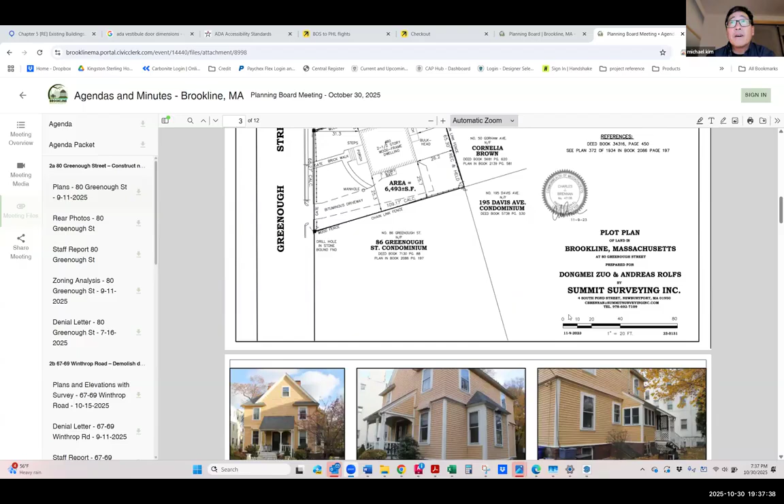The rear yard has a 30-foot setback. The house is slightly existing non-conforming. And I think it's important to note that in the rear of the house—I don't have the picture, oh yeah, sorry—there is the side of a garage and pretty much nothing else.

So going into this backyard affects pretty much nobody, and we're able to preserve the front of the house in its entirety. So we are applying without a compensating amenity, though I think it's a strong reality that keeping the existing house with all its nice detail facing the street is a nice amenity for the neighborhood and for the community.

As the owner, Mr. Rolfs explained that they are doing this for their now adolescent disabled son. To this date, the father has been carrying the son into the building, which was fine when he was a small child. He's now an adolescent, and none of us are getting any younger. So it becomes increasingly difficult, and this project is designed to accommodate them.

I'd start on the second floor where there's a new master bedroom suite and their son's room will be adjacent. He needs assistance through the night, so the doors are combined. And then a large barrier-free bathroom forms the extent of the addition on the second floor.

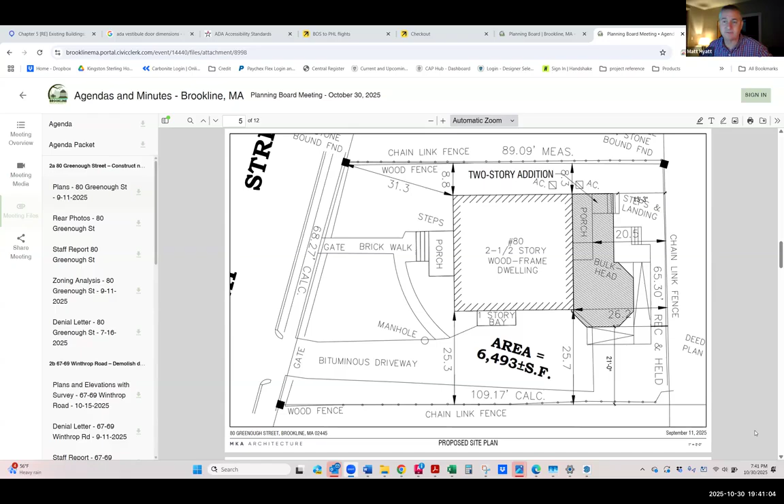So I guess I will turn it to members of the board. Also, if you have thoughts on whether or not we should be looking for a counterbalancing amenity—I was looking online, the site's really well landscaped, I don't think it needs more of that. Nothing that Michael's proposed, I think, detracts from the appearance of the house. It's quite handsome, but I'm interested in your thoughts.

I have a question, Michael. It looks like the first section of the handicap ramp that comes off the driveway is a ramp on grade, is that correct? And then it becomes structural—correct. And the first section is a 1-to-20 slope, meaning it's not technically a ramp, just a footwalk with rails. And then the ramp is the second link.

Yes, I see. Your plan didn't show grading, but I'm sure there's nothing of concern—I think the only thing to be careful about would be where the water's going, making sure you haven't changed the direction of the natural gradient of drainage. That would be my only comment.

Fair point. And the lot is so flat that getting a contour survey didn't show anything. Right, so I'm thinking that you're pitching the water to the side as well as a little bit to the other side, and you should maybe have a little curb-like barrier so you can maintain the water on your site and not create any issue for your abutters. That's the only question I have, but other than that, point taken.

I'm good to go. I think it looks like a needed and modest sized addition to meet those needs.

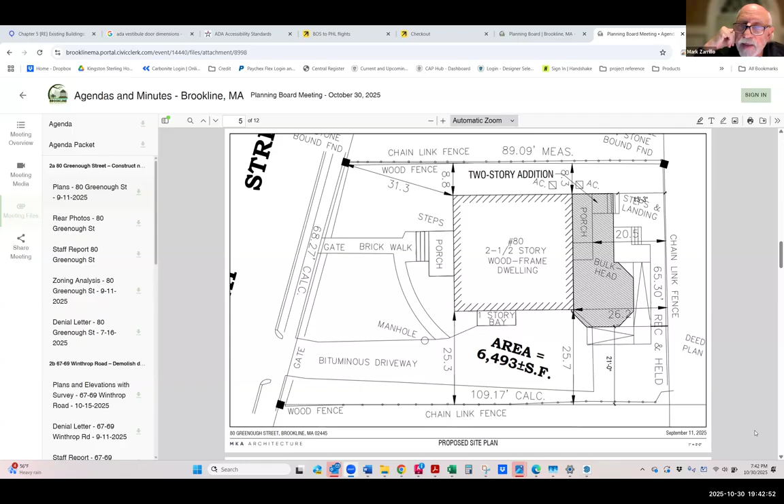Is the ramp a structure, or is it made out of paving on grade? Both. This portion will be made on grade, the 1 to 20 portion. The 1 to 12 will be wood with composite decking.

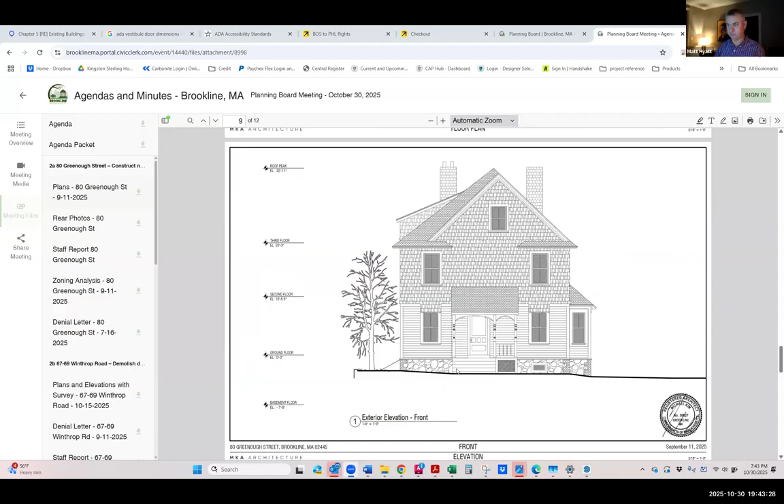Do you need a railing on the 1 to 12 section? Yes, you do. It does look like that is steeper or higher than a 30-inch drop off. Yes, and here it is.

Sorry, the other thing - we would obviously be landscaping and properly draining, and probably making sure the ground is adequately porous, or making it so.

You also should have a slight edge to the sloped walk. That's usually required if you don't have an even grade, just so the wheel doesn't roll off - it's contained. I think it has to be 2 inches high, just a little edge condition so you don't end up slipping off to the side. Another good point. Thank you, Mark.

Thank you again, Blair. Andrea, and then Steve. So I think I understand it now. If you go to the plan - this is more an architectural question - the triangles created by the ramp and the octagon, that's all open. So if water were to get in there, would it drain through the ramp, which is open underneath, or does the ramp have closed walls underneath it?

First of all, these are planters, so they'll end up being planted. There'd be some drainage through the structured portion of the ramp and small deck. And this being on grade, we'd have to manage the drainage.

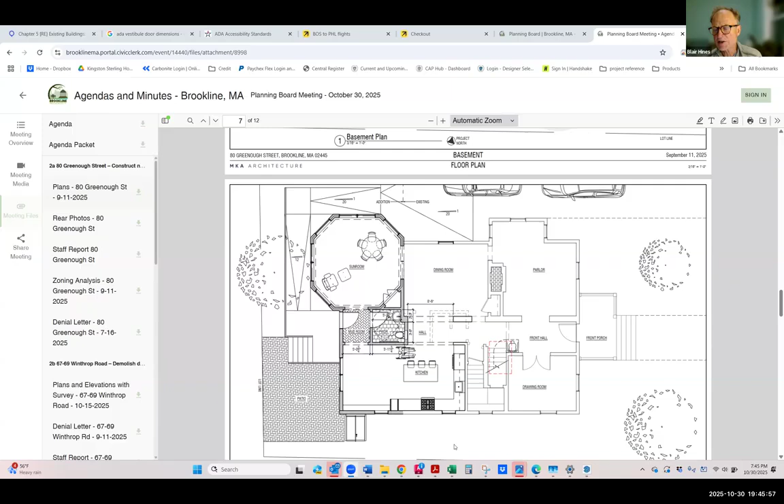I'm just thinking of the abutters - I think part of this would depend on how the existing roof downspouts are. Are they grandfathered into the sewage drainage system of the town, or are they flowing overland? They end up on the surface.

Okay, I'm trying to see if we're having one. Oh sorry, and interestingly, architecturally, there are no gutters in the house. So the roof runoff drips onto the land, directly onto the soil. And while we did not do any excavation, I would imagine it would be sandy loam or something with some porosity, unlike my house, which is less than half a mile away, which is all clay. So it surprisingly works quite well with a simple drip edge off the edges of all the roofs.

There's apparent evidence that the soil is reasonably porous, and there's no evidence of drainage going onto the abutters. Okay, thank you. Yeah, these are great points you're making about drainage, planning board members, but keep in mind that before they get a building permit, the DPW will review all of the drainage issues before they sign off on this plan. As you may or may not be aware, our neighbors to the west are very adamant on stormwater management to the point of overkill often, but I think our square footage is below their provisions, not that it applies here. Just an FYI. Thank you.

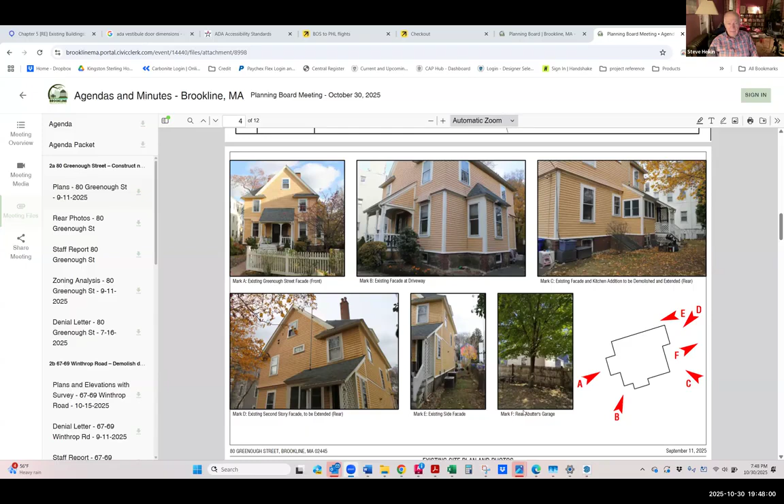We'll go to Steve next. Thanks. So I also had a question about those triangular spaces between the ramp and the sunroom, but that was addressed. But Michael, if you could go to the basement plan - I'm okay with this project, I just had a technical question. I see that within the new octagonal sunroom, you say it's a crawl space.

There's also a bulkhead door with what looks like a couple of steps down, and then there's another sort of half flight of stairs between this new space and the existing basement. So I'm just wondering what's going on there - is it a crawl space or is it a full height space? I'm just not clear on the relationship of this addition.

That's a good catch, actually. We've moved this bulkhead several times. There's no need - the owners have no need for additional storage in the basement. Therefore, to save costs, we're doing a continuous foundation, but we can keep it at 4 feet below grade.

Yeah, but that is true - to get into this portion of the basement, the dashed line is the existing bulkhead access to the basement. We'll probably extend it here to make this the same level. But that is not on the drawing. I didn't catch that with my draftsman, and you did.

So thank you, we will correct that. It doesn't affect the plans at all, but there was an unclear relationship between what's basement and what's crawl space. Good catch, fair enough.

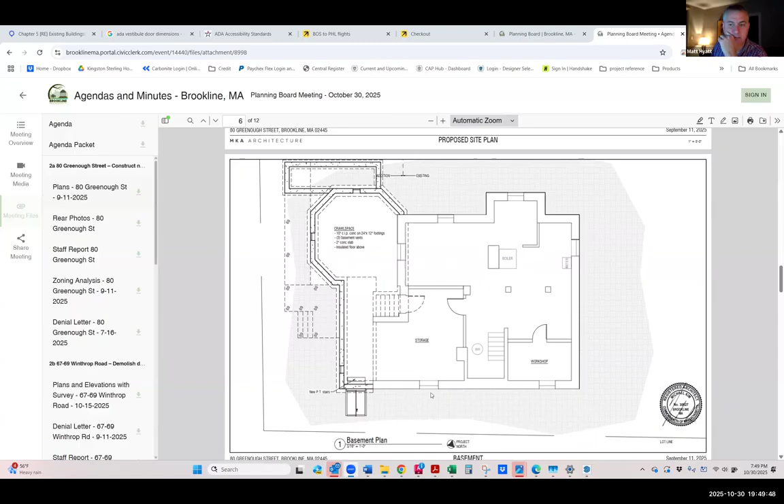It's only for the length of the ramp that condition exists at the edge of the driveway, but that could create some issues if you're not dealing with it up front.

Yeah, point taken. We did take, sighting off of a 4-foot level, the existing floor, the existing grade, trying to get this to 1 in 20 so we didn't have to do the full railings. So that part we're not 100% sure about, but yes, we will address it.

Did you have any drainage, spot any sort of grades you were working off of, Michael? Did you have any spot grades you're working off of, or no? No, because there's less than 1 foot of contour over the entire site, so we tried to put in a contour.

There's less than 1 foot of contour over the entire site. Right, no, I understand that.

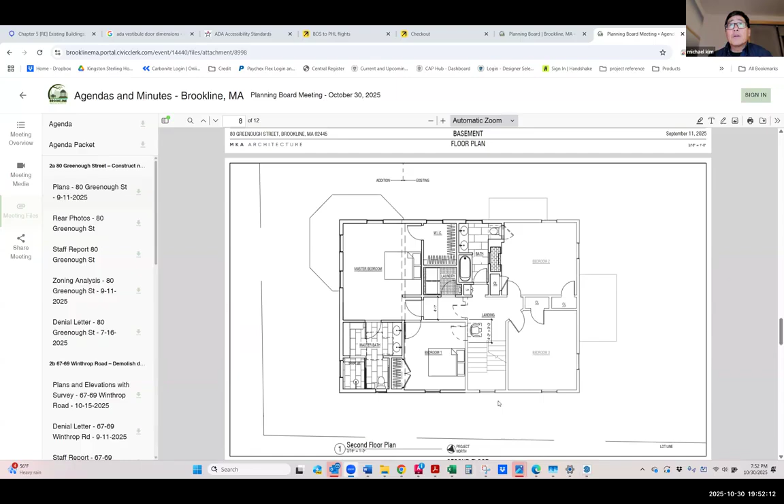Well, it seems like you're building up a ramp, actually starting a bit of the slope from here at the driveway. Yeah, mounding up.

I mean, as part of the building permit, wouldn't he need a site plan with the grades? Well, again, there wasn't enough grade to show.

Right, but you're creating a grade, and we'll put in spot elevations. We don't have a transit in the office, so we kind of did this with a homemade transit.

Well, it seems like at the end of your ramp on grade, before you go to a structure of decking on piers, you might just have a 1 or 2 foot retaining wall, with a fence, so you're not creating a slope down. And this is often done by the landscaper in situ.

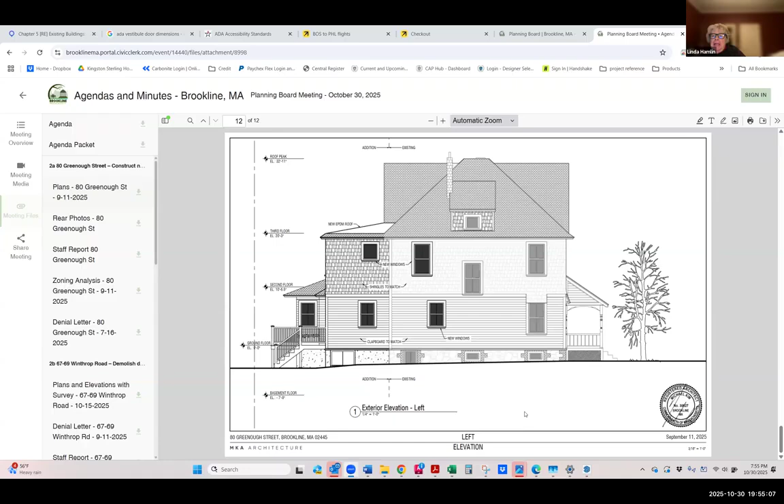Not sure what it does for you, but it keeps the rain off your head, or your nose. I think Linda's point is also that where it ends seems like a weird spot, doesn't it? Yeah, it goes beyond the deck. I'm not getting it.

I think it's just a drafting thing that needs to be cleaned up. Or if you really wanted to make it useful, maybe you'd extend the deck, or extend the octagonal roof straight over and end it there with a bracket. Otherwise, it's not really doing anything for you. Make the stair wider or move the deck over, and put a column.

You know, I remember the red line. I took that distance, projected it vertically, made it equivalent, and did that. That was my aesthetic judgment at the time, and I think I'll reconsider. Okay, right, we're just hot dogging here, we gotta earn our big salaries.

Yours is probably bigger than mine. No, ours is zero. When I serve on the board, mine is several multiples of that, in fact.

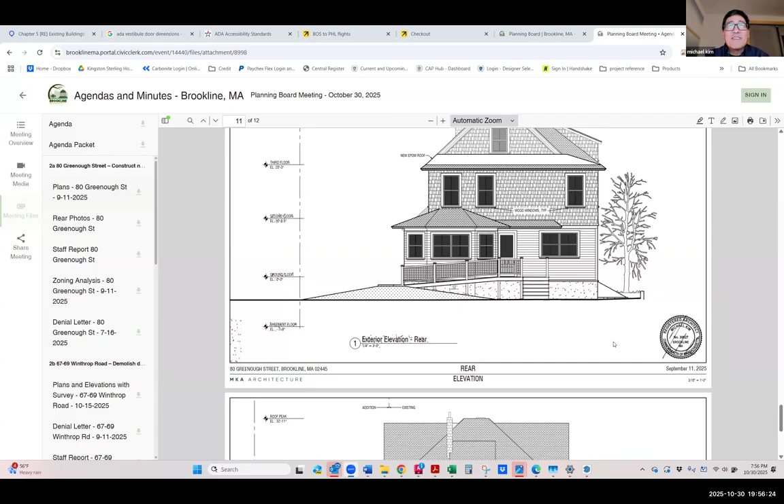Anyway, other than that, I think I'm glad that it's being done to this house, and I hope it satisfies the needs. I have one other question.

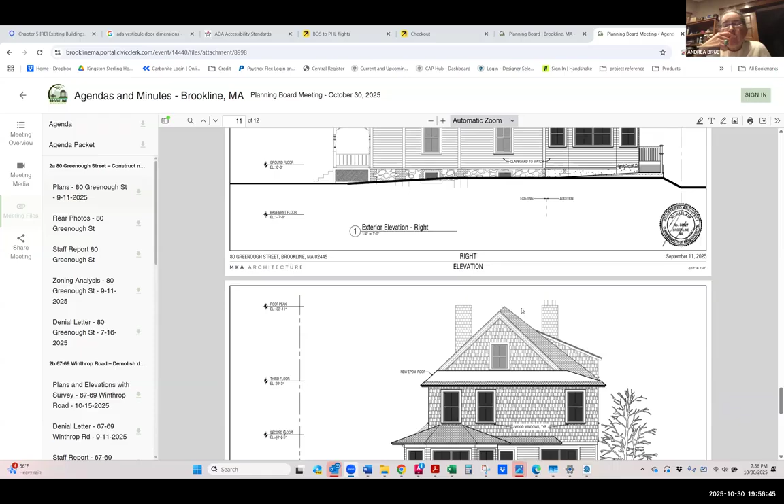On the second floor where you have the EPDM roof, then you have shingles at the eave. We're trying to recreate this detail so we don't just have an edge of rubber. It's a small decorative band to try to conceal the fact that most of it is rubber, since it's too shallow a slope for traditional shingles.

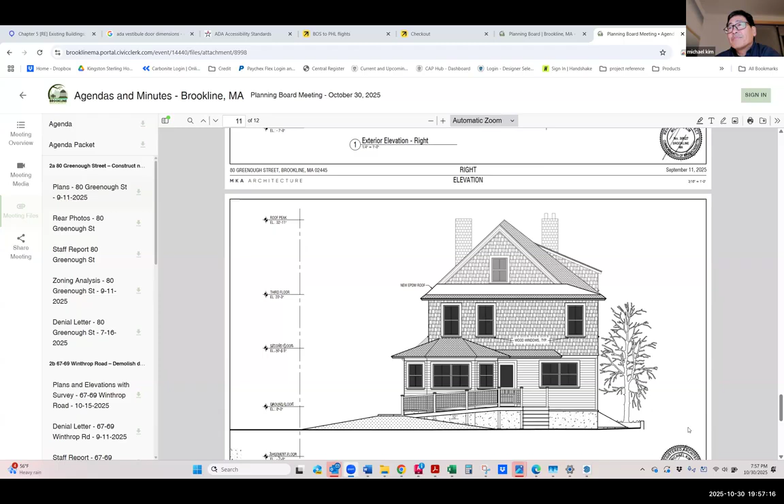Without blocking this window, I'm just trying to picture that outside corner, actually at the edge. The line weight is to try to make this darker, but here we would be extending this plane for that short period.

And yes, there will be several discussions with the framer and the roofer on site to work that out. That's a detail I don't think I've seen, how an EPDM roof transitions into shingles. Good luck with that. Maybe metal would be more appropriate, or something—it might be easier to build too.

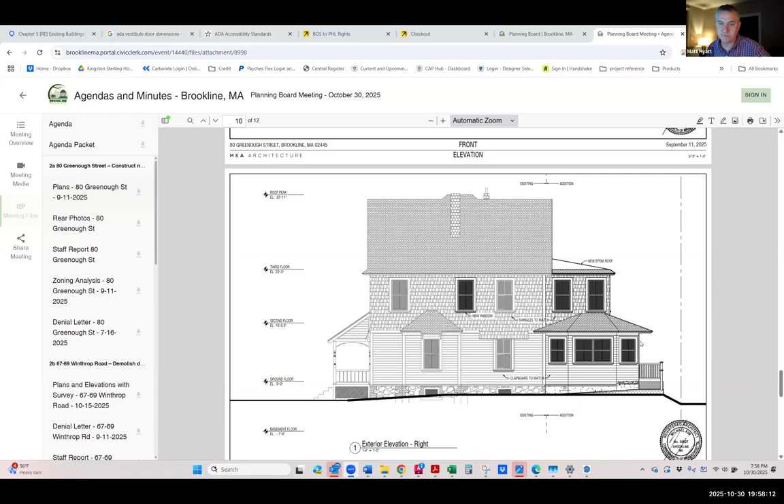All right, but conceptually, I think we're all aligned with this project. Let's see if there's any members of the public who'd like to say anything. If you would, please use the raise hand function in the reaction at the bottom of the screen.

I can do a stop. I'm not seeing any hands raised, so I think we can move to a vote.

I would agree with you, Matt, that we should strike number 2, which is the landscaping, because although occasionally the Board of Appeals has allowed an architectural feature to serve as a counterbalancing amenity, they don't really like to do that. I would agree that it's an amenity, but it may not serve for 5.43. So you may want to just give the special permit under MGL Chapter 40A, Section 6, without a counterbalancing amenity. That seems appropriate to me.

Anyone have challenges with that? I'm okay with that. Fine, all right.

So the planning board recommends approval of the site plan prepared by Charles J. Brennan, professional land surveyor, dated July 3rd, 2025, and architectural plans prepared by Michael Kim, registered architect, dated September 11th, 2025.

And the planning staff recommends the following conditions. Number 1, prior to the issuance of a building permit, the applicant shall electronically submit final floor plans and elevations stamped and signed by a registered architect, and a final site plan stamped and signed by a registered engineer or land surveyor to the director for regulatory planning or designee for review and approval.

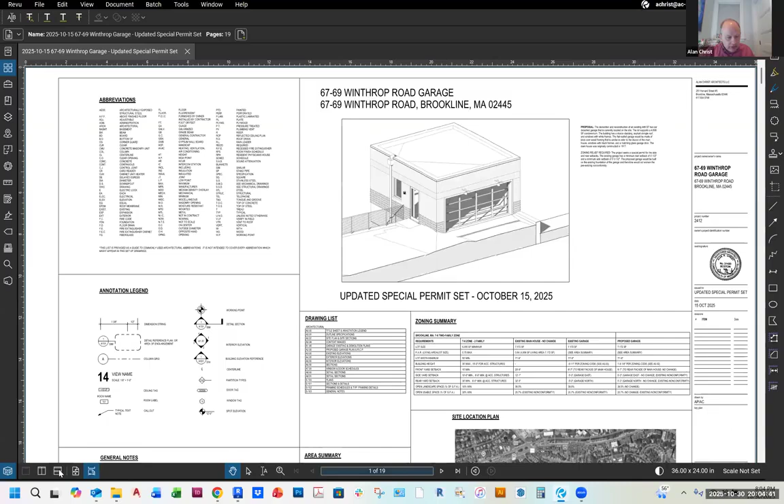I can go to some photos here. Okay, it's a concrete structure with block walls. It has a very low ceiling, it's structurally failing, and it has no parapet—it just drains onto the walls here. So the concrete and block structure is a heavier structure.

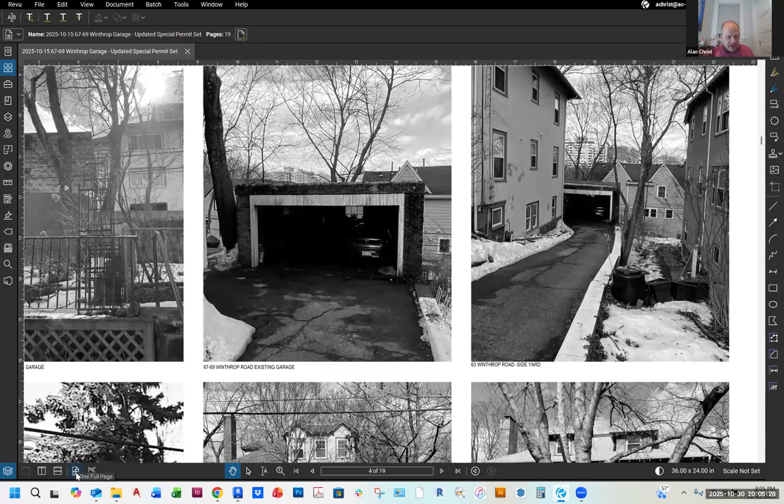So our intention was to reduce the loading on the foundation by changing to a wood frame structure, which has a clear span through the provision of TJIs for the roof framing, and then it has an 8-inch parapet with proper parapet drainage.

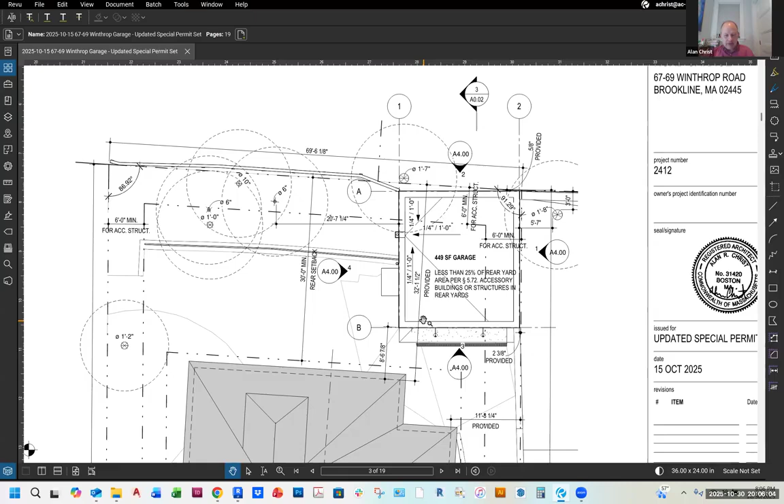So this is what brought about the special permit, just the fact that the TJIs and a proper parapet, and also a realistic amount of space for a garage door opener, increase the height of the structure. Those are the only things increasing the height—it's the provision for a lighter structure with proper drainage and a proper parapet.

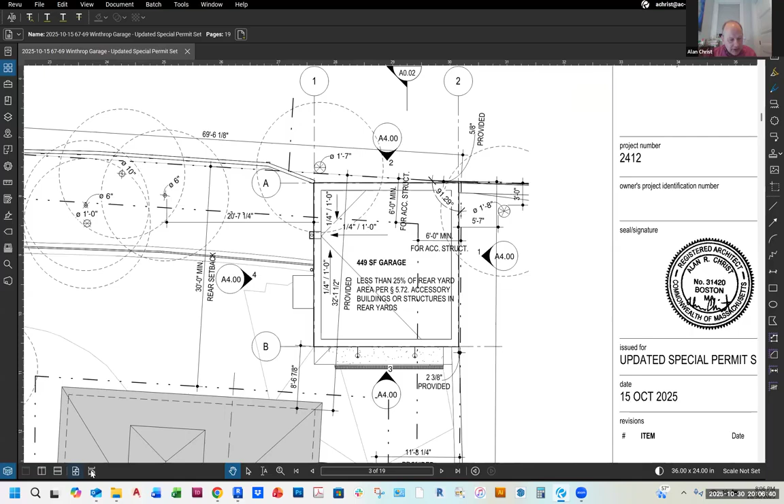The structure is 449 square feet. The setback is 3 inches from the side, and about half an inch from the rear, although it's an angled property line here, so there's a bit of variation on the back. I can show you a 3D view of the structure here so you understand.

The existing house is a yellow stucco arts and crafts style house with green trim and white windows. It's very much surrounded by trees, so not super visible from the street. The existing garage was all block, a kind of beige color, so we were switching to a brick veneer that would sit on top of the existing foundation.

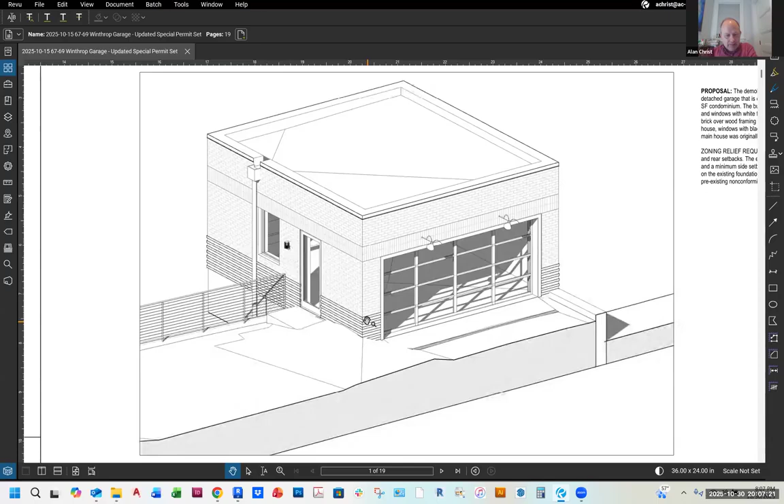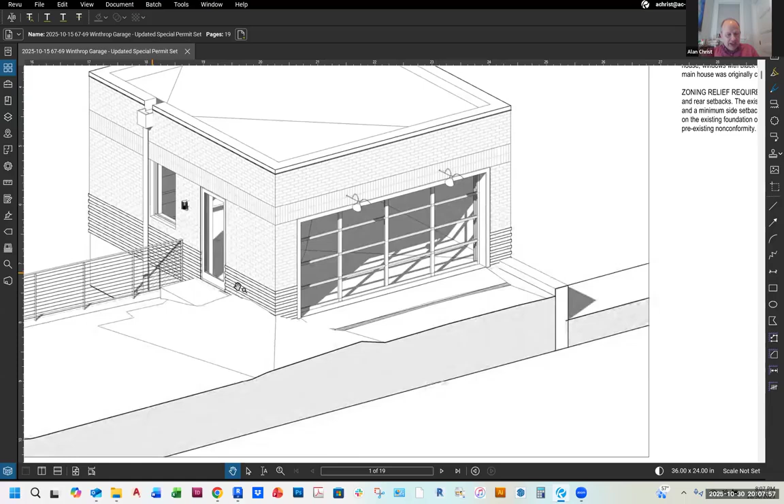There's decorative projecting brick coursing that projects a half inch and defines the base of the structure. Soldier coursing two rows above the garage door, a new man door on the side, and a new guardrail on top of the existing retaining wall. So we were hoping to create a modest structure that worked with the existing foundation and did not clash significantly with buildings in the immediate context.

Otherwise, I think that's good, Alan. That's pretty good. Yeah. Good, okay, good job. Thank you. I'll talk as much as you want me to. Well, I think you're getting the hook. That's good, long night ahead of us.

So, Chairman Allen, are you set for us to move to conversation? Please. All right, so a very nice set of drawings for a garage, Alan. Yeah, really, I appreciate the level of detail. I'm interested what others think. This seems pretty straightforward. I think it's actually a nicer looking building after the replacement than even what's there currently. So it looks like a nice replacement.

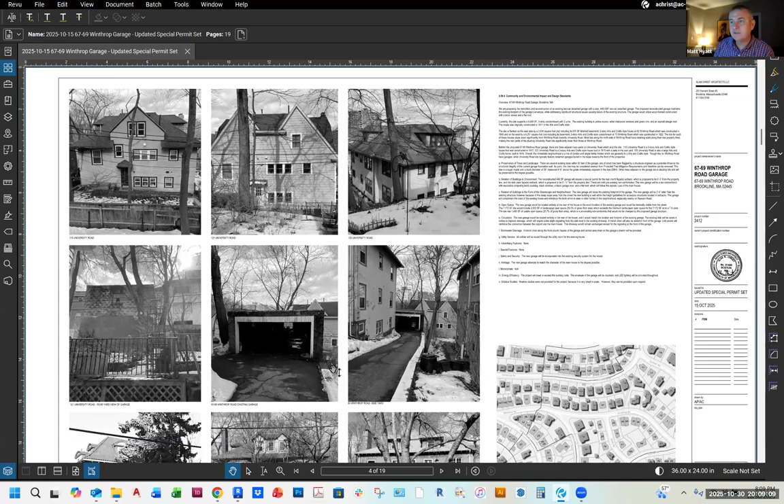We'll go to Blair and then to Steve. Yeah, I have no issues at all about the garage. I think a lighter structure does make sense on the existing foundation. Was there a survey done, Alan? Yes, there was a survey. The reason I'm asking is if you look at the center right picture - go to the photos.

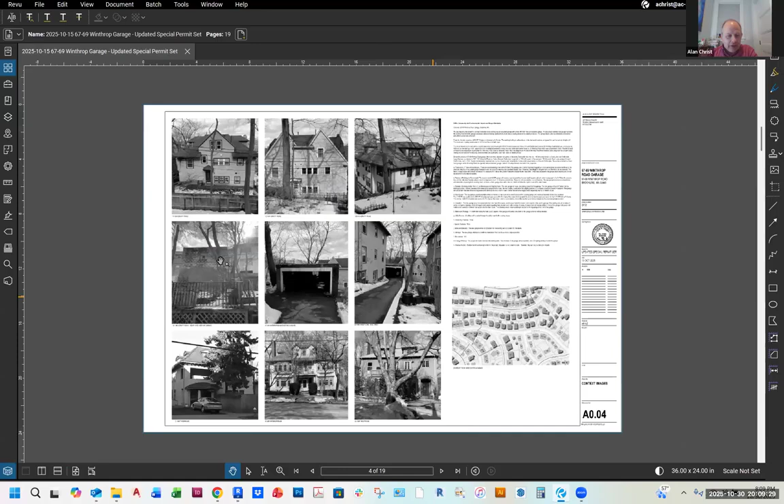Okay, blow that up a little bit more. So the reason I'm asking is, yes, you're looking at exactly what I was looking at, which includes the tree looking like it's being pushed a little bit. I was wondering whether the surveyor actually picked up the location of that wall, because it looks like it's fragmenting. I don't think that's before us, but I think the condition of that wall, it would be advisable to take a look at that, particularly since the garage will require vehicles being able to go along that driveway.

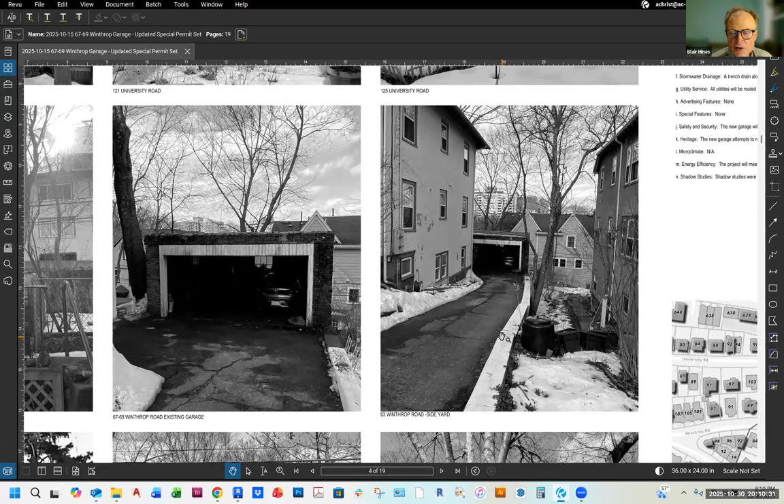At least from this photograph, it looks dubious. I did not go to the site, so I don't know how much slope those walls are holding back. But right where your hand is, it looks like the wall has shifted. Yep, right there. So anyway, I have no problem approving this, I just think that as this thing gets started, you may want to have someone take a look at those walls. Agreed, whatever has to be done is getting done. Thank you for that, Blair.

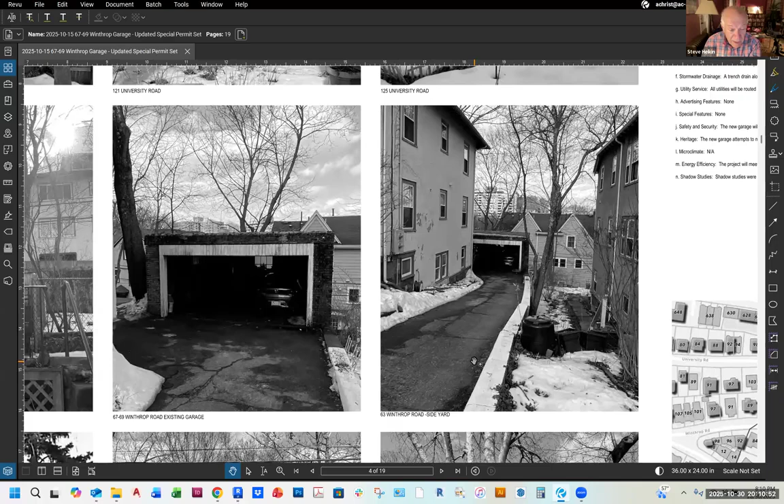Thank you, Blair. Steve, you're next. I also have no issue with this, and I agree with Matt's compliments on the nice detailing of this garage. But I do have another technical question. I see on A4, the west elevation, there's a stair shown, and you also get a glimpse of it in the three-dimensional rendering you showed us, on the title page. I don't see the stair on the plans anywhere.

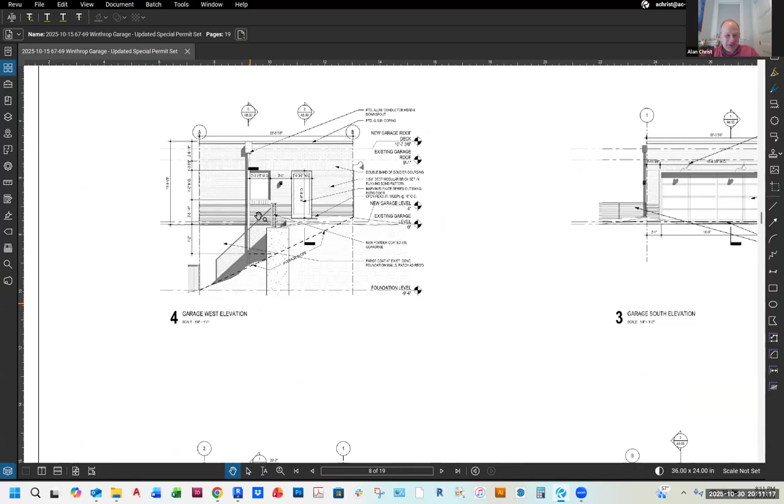This is not a stair, it's a shadow. That's a shadow? Yeah, I'm sorry, it's very confusing, and you're not the first person who has made that comment. We should have turned the shadows off. We don't usually put shadows on architectural drawings, Alan. I like your drawing of brick.

It was drawn at noontime, so the sun was high. And so the rendering, the little vignette on the cover sheet, that's a shadow too, huh? Boy, that could have fooled me. Same thing, alright. Yeah, it was from the south, that's where the shadow is cast. It admittedly is pretty confusing, and we probably should have turned it off.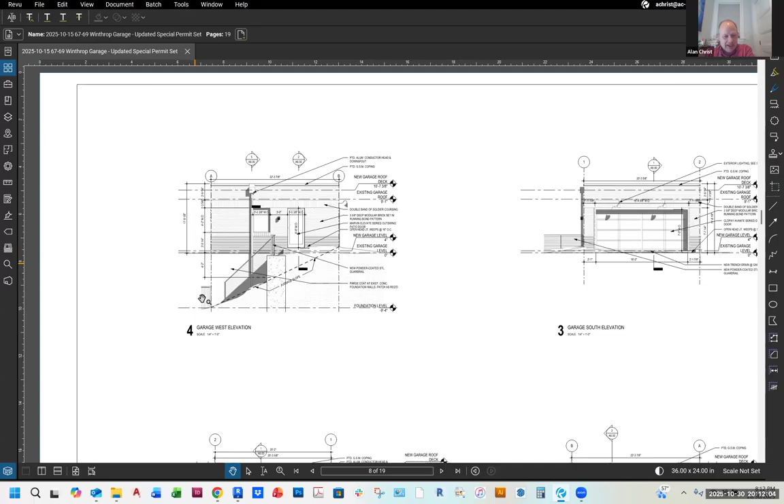This is just a big blank concrete foundation wall that we will parge coat and spruce up a bit, but that is to remain there and no changes in that area. Okay, no changes and no stair. Okay, thank you, Steve.

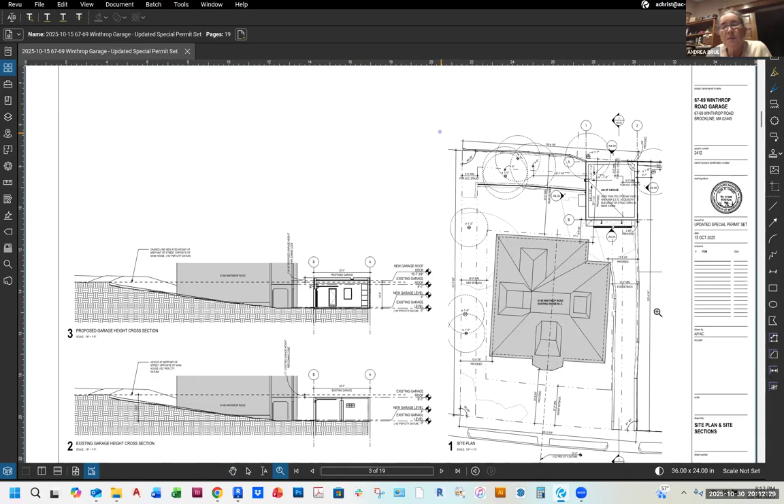We'll go to Andrea next. Could you go to the site plan, please? Architectural or survey? Architectural, I'll zoom in. That one's good. So I have to ask about the trees. The tree in the back near grid line 1, that's not on the property, is it? Not on their property. Will the construction of the garage affect the tree?

No, insofar as we're not changing the foundation. I mean, obviously when they're building this thing there's construction work happening, and they've been in discussion with the neighbors about this, but they will take every measure to protect adjacent trees and do what they can. Just not demolishing that foundation alone went a long way towards preserving that tree.

Right, so I was just thinking if you're going higher in the garage, would that affect anything? But it sounds like it won't. Okay, no. You can almost see the tree in a Google Street View, and it looks like the limbs start significantly higher than the top of the garage, although you can't even see the garage.

All right, thank you, Andrea. We'll go to Mark next. Just one question - did you have to get a tree protection permit to do the demolition of this garage, Mr. Allen? Well, not for the demolition, but we'll have to do it for the construction under the new bylaw, because it's within 30 feet, obviously. So we'll have to have the plan in place of what we're going to do to make sure that we don't damage it.

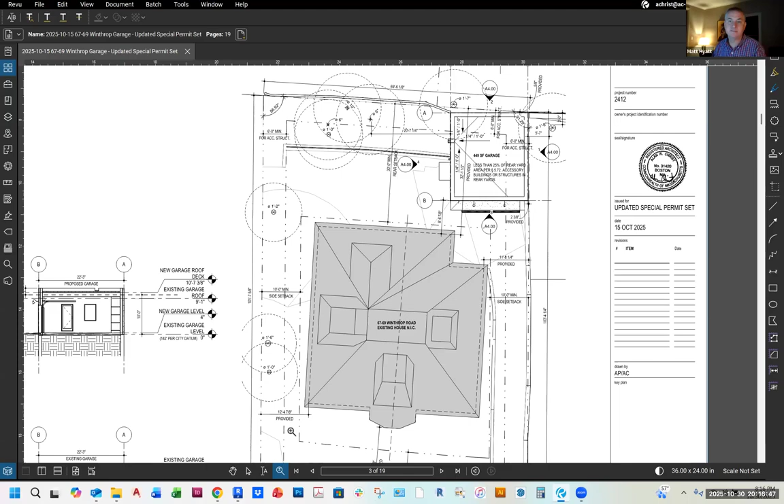Yes. All right, we'll do roll call vote. Steve? Yes. Mark? Yes. Andrea? Yes. Linda? Yes. Blair? Yes. And the chair votes yes. I think that's everybody. Thank you all, congratulations. Thank you, thank you.

All right, up next we have 43 Kensington Circle. So 43 Kensington Circle is looking to add a partial second floor and third floor addition to the rear of the house, as well as make adjustments to the basement and first floor. Again, Bob Allen and Ashley Duval are here to represent this application. The Preservation Commission did rule that it was not historically or architecturally significant, so they did not impose a stay of demolition on it, and I will let the applicant walk through it. They're looking for a FAR special permit for relief on FAR, as well as a special permit for relief on the side yard setback.

Great. Again, Robert Allen, 300 Washington Street in Brookline Village, here representing Young Fun and Young Shen, who are the homeowners at 43 Kensington Circle. And we have Lan Qin and Dan Eldridge here, who are the architects on the project. As Cameron noted, this is a matter of - first of all, I want to say the homeowners did a lot of reach out for the neighborhood there on Kensington Circle.

It's a close-knit neighborhood. They reached out to numbers 31, 39, 40, 49, 50, and 60. The only feedback they got was from the neighbor most impacted, the immediate abutter, who wanted to make sure the existing privacy screening was maintained, which of course we want to also. This is actually an old school addition.

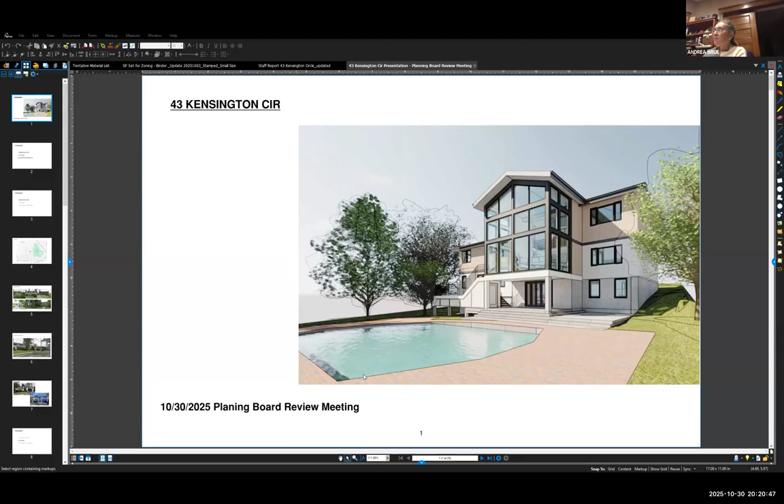Did we lose her signal? I think she seems to have frozen. Should give her a couple more seconds. Lan, we lost you for a minute there. Maybe take your video off, it might be easier, you were freezing for a while. Okay, I can go back, I can repeat what you just said.

I will start with the owner's request of this house. Both owners are remote workers. They have two teenager children and one parent living with them. After moving in, they found many spaces inefficient and the circulation awkward, especially with the limited bathrooms across three generations. They came to us hoping to transform this house into a more functional and connected home. So our design approach focuses on three aspects: the neighborhood and style, functionality, and the presentment.

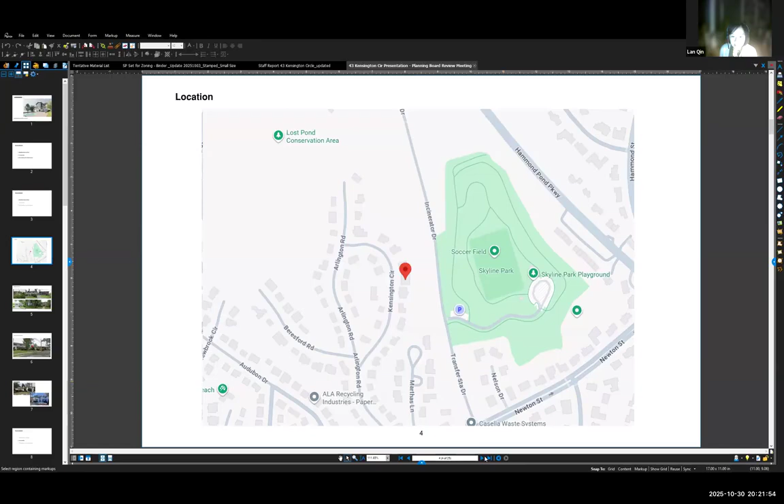Neighborhood and style: this single family house is located at 43 Kensington Circle in Chestnut Hill, next to Skyline Park. The house sits among similar sized single family houses. These are photos from the street. From the street view, it actually appears low on the northern side of the house compared to other houses in the neighborhood, so adding a level above this northern section became a natural massing decision. This is the existing condition of the house, with only one level on the northern part and two levels on the southern part. This is the back view of the house.

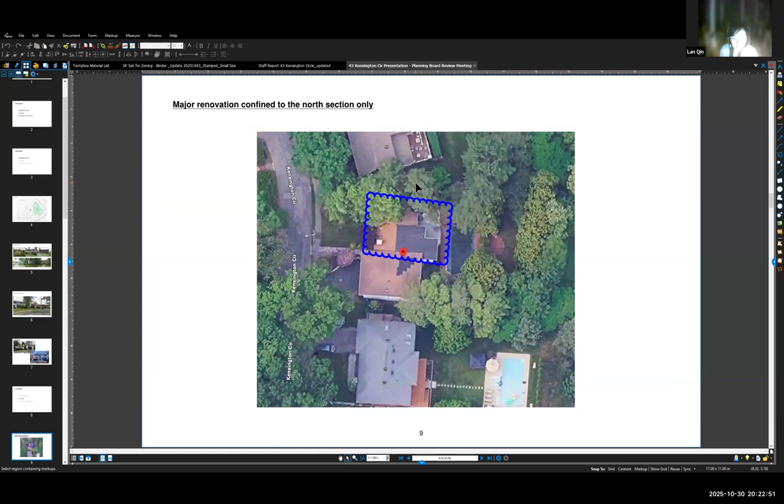Functionality: since the southern section works well, we confined the major renovation and addition to the northern part of the house to minimize construction impact. The other thing I want to point out is this is a split level house, so the floor naming can be a little unconventional. This is a quick diagram: this will be called basement, ground floor, first floor, second floor, and the proposed addition will be called third floor, though it's right above the first floor.

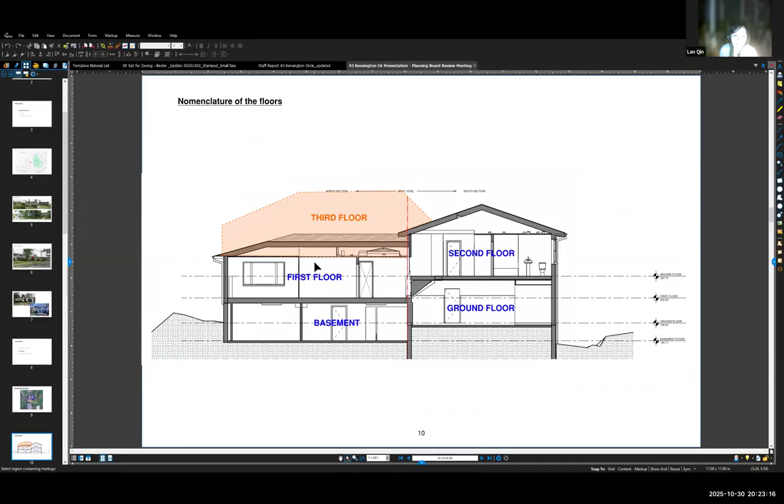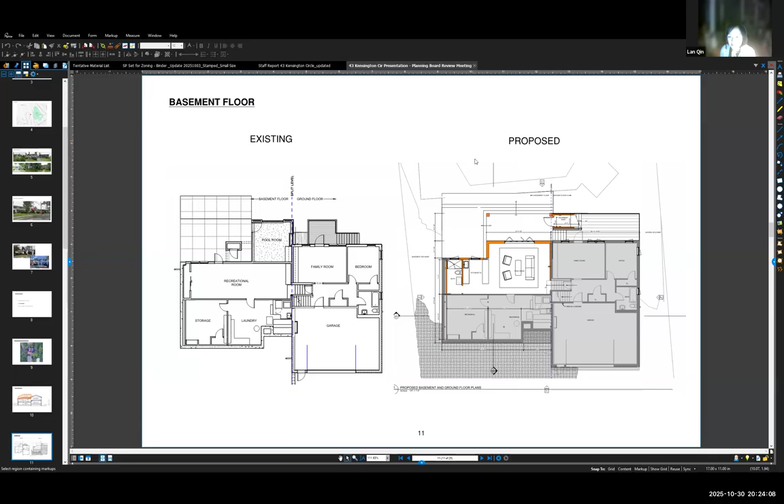This is a comparison of the basement floor. As you can see, that's the circulation core of the house. On the basement floor there's an awkwardly shaped and long path to the backyard, and a non-conditioned pool room blocks the view and access to the backyard. So we propose to remove the pool room, expand the living area, and create a direct access and open views to the backyard and the swimming pool, which already exists here. That's the basement. This is the first floor.

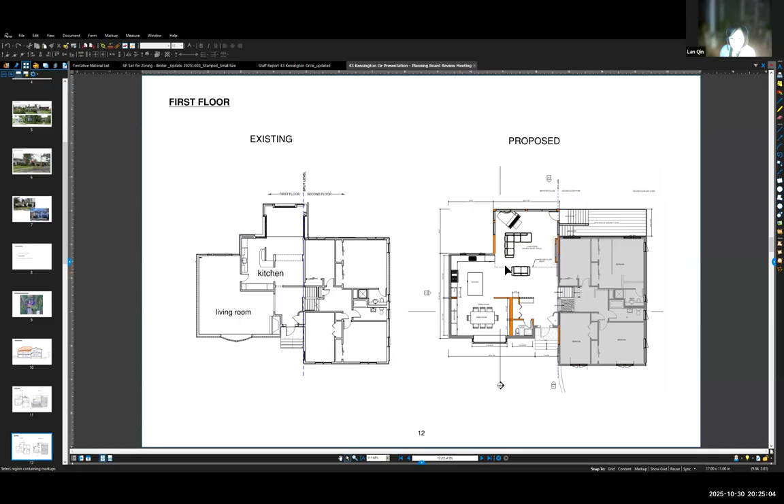It's the existing proposed. Currently the living room is oddly shaped with a corner fireplace, and the kitchen and dining are awkwardly positioned. So we propose to reconfigure an open plan, shift the living room towards the backyard with double height floor space here for light and views, and move the kitchen and dining to the formal living area for better flow. We also will rebuild the back deck to connect the ground floor and the upper levels.

On the third floor, we are adding one floor above the first floor to accommodate a master suite with walk-in closet and bathrooms. We are also adding a bedroom for the daughter, and another bedroom. This floor will be connected visually, and also spatially, to the double height living room below. So this is connected.

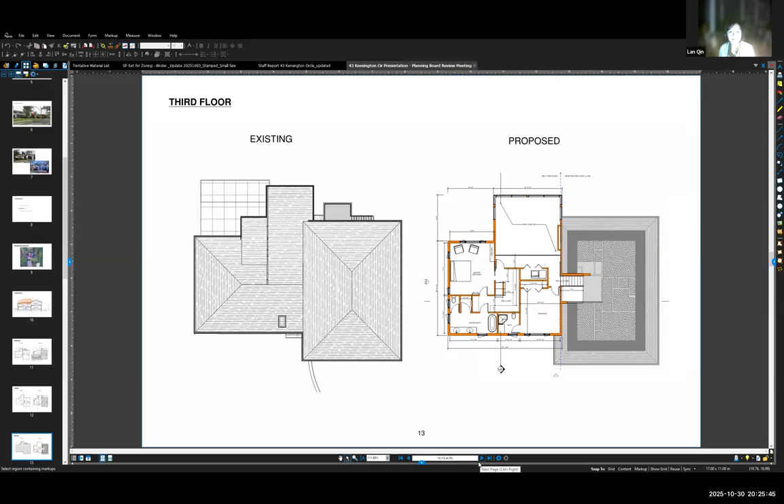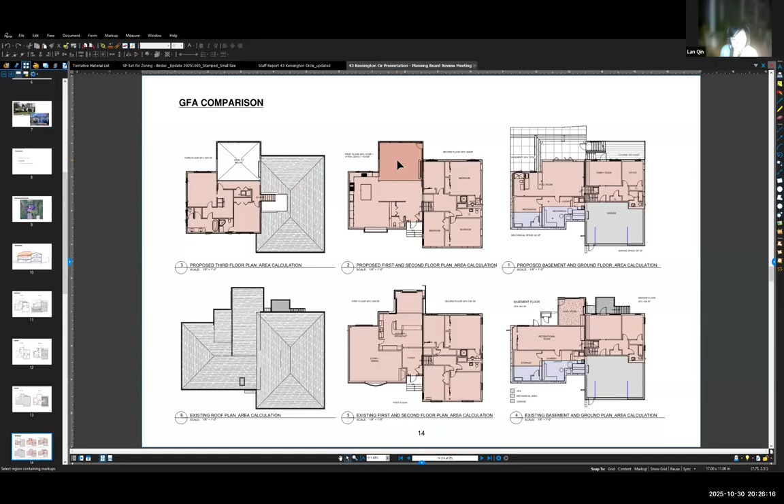That's the floor plans. This is the gross floor area comparison. The bottom line is the existing, the above line is the proposed. These drawings are on the drawings, so I'm not going to talk too much. I just want to point out that when we calculate the double height living space here, we weighted in the height using the formula from the zoning bylaw. The final gross floor area is 5,330 square footage, within the zoning limit, which is no more than 20% over the allowed gross floor area with special permit.

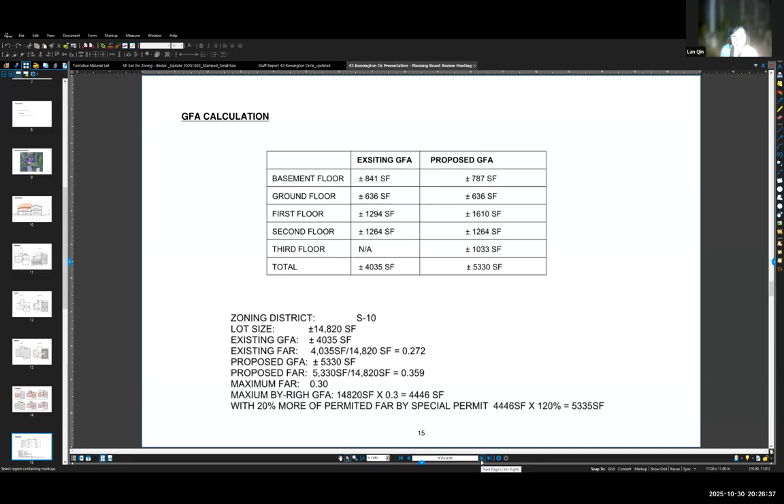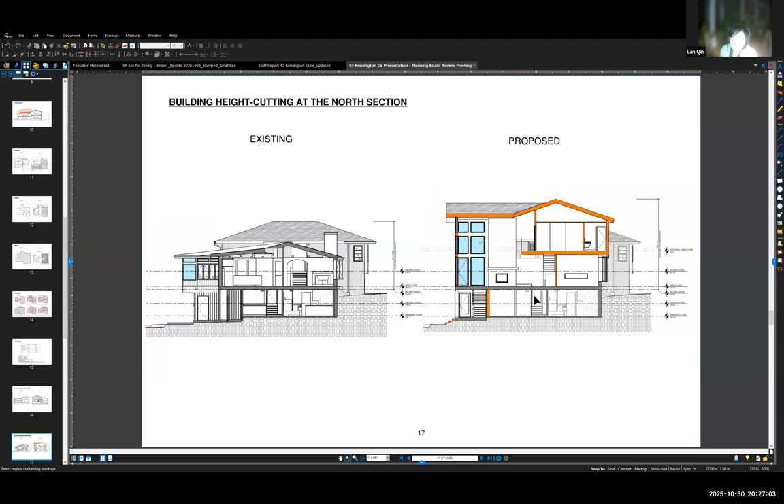The next 2 pages show how the added floor will affect the building height. This is cutting the north-south direction. This one is cutting through the north section. So finally the proposed building height will be about 25 feet 6 inches, well below the allowed 35 feet.

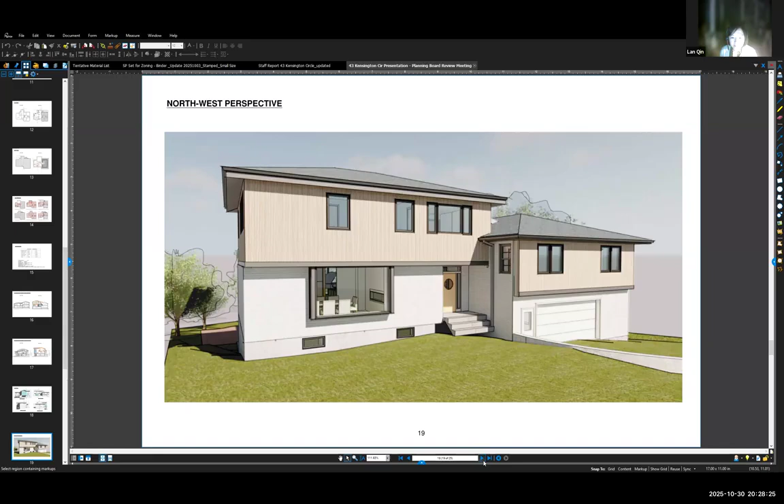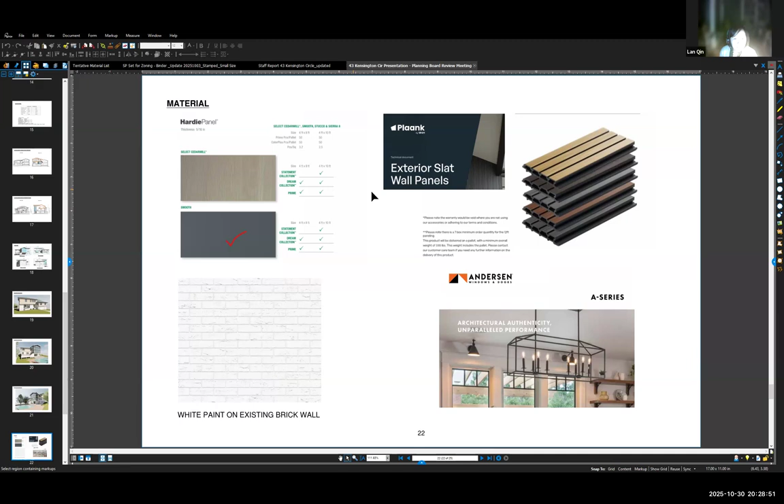This is the initial material palette. We are thinking of using a wood-look slat panel to echo the existing rhythm. If we go back to the existing, it actually has some vertical lines that may not be visible here, so we want to respect that, but with a better refined finish and texture. We are also thinking of using white paint on the existing brick wall.

Am I back? Yeah, you're back. You just went out for about 15 seconds. Oh, okay, we got it fine, all through the materials.

Last but not least is the preservation of the environment.

Try turning your video off. Lan, we lost you again. Thank you.

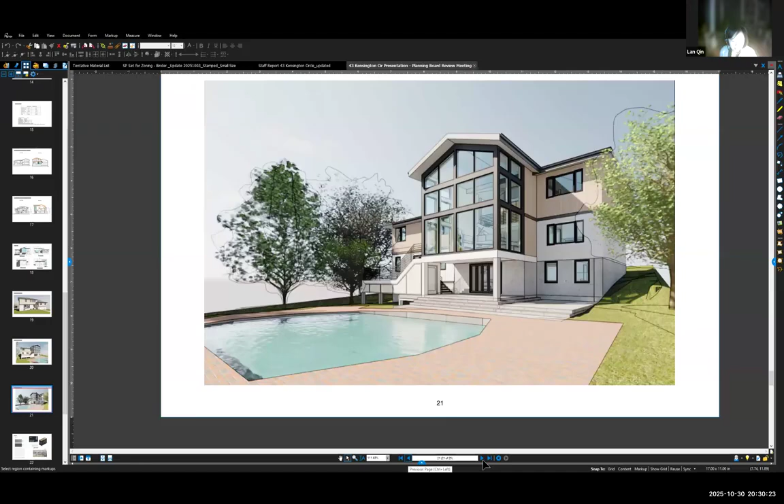Matt, I'm comfortable with the board taking over, thank you. Should I... Okay, you're back on, Lan. Well, let's let her finish, she had one more thing on environmental preservation. Go ahead, Lan.

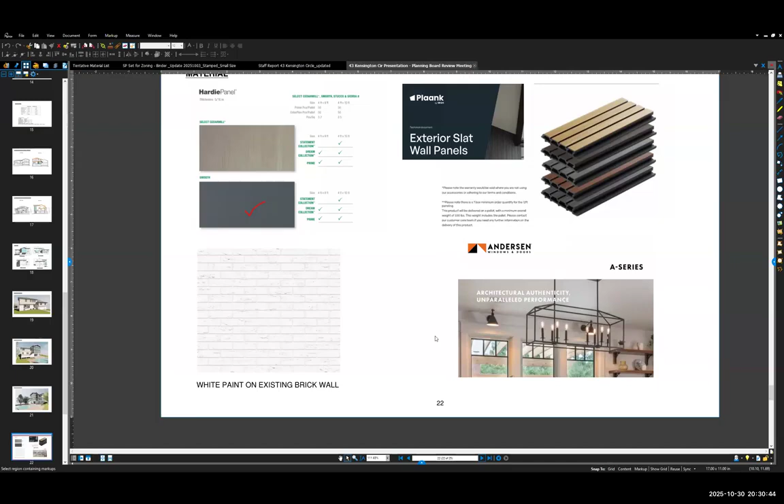Okay, that's my last page actually, so I will repeat this part again. Because the major renovation and addition sits mostly on the existing footprint, no tree will be removed. The backyard remains unchanged, so not much impact for the landscape. That concludes my introduction. That's all, thank you.

Thank you very much, Lan, for taking us through all that. I don't have any immediate reaction other than that glass room on the back is very, very large, but if that's what the client wants, they're paying the heating and cooling bill.

Members of the board, thoughts on the design as presented? I'd like to see the back elevation again. Back elevation, hold on, the view from the rear. The view or the elevation itself? Sorry, the elevation of the rear.

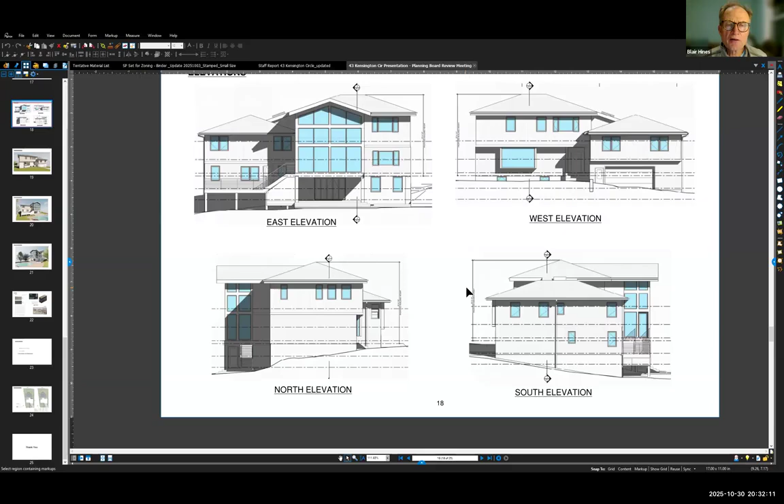You said the building does not increase that much. What is the height from the pool deck to the gable end of the glass wall? It looks like it must be 30 feet or more. Yes, let me see, I don't actually have that, but from here to here is 25 feet, 6 inches. Show me again, what's 25 feet? I can't read the elevation.

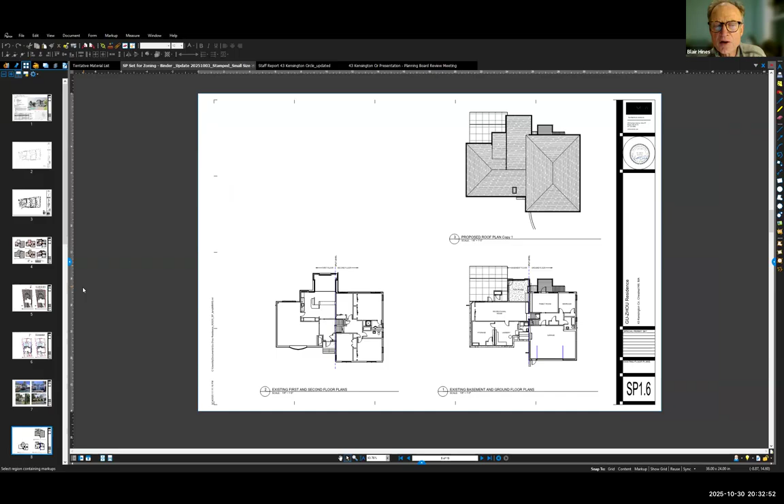From the midpoint of... let me bring it back, if you put it back to that cross section that was perfect, or the plane you had just before. Let me zoom in, just hold that one. Okay.

Okay, so it looks to me that the rear elevation will be something like around 35 feet or so. Does the architect help me out here? Does that sound right to you? That sounds about right, that looks right.

Okay, yeah, the opening, and in Bluebeam I can measure. From pool deck to what level? Well, to the top of the gable that you now see to the upper left-hand corner, Matt. Yeah, it's like 25, 30... 34 feet 5 inches to the top. Thank you, Matt.

I don't have any other questions or issues. Thank you.

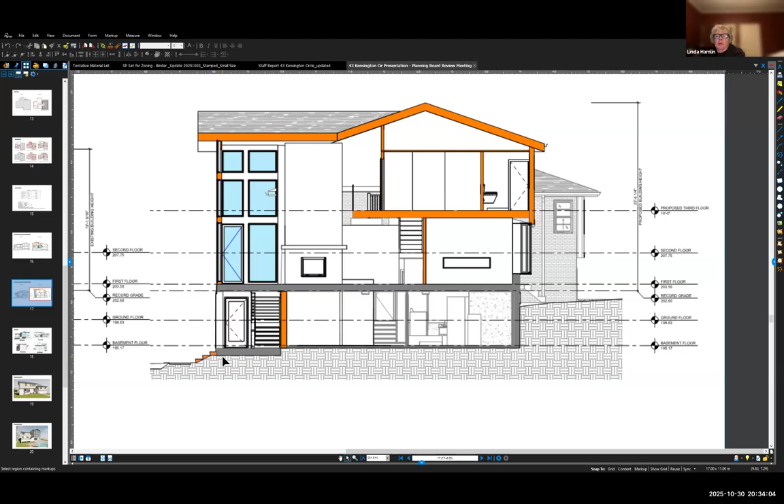Other members of the board? No, I'm good. This is Linda. It's surprising how small they look from the front roadway and how much the drop off takes away from all this. So I don't have any questions really.

Right, other comments, anybody? I did go to Google Street View and I do see what she was talking about, with the projecting upper floor above the garage being vertical wood slat and the lower part horizontal brick. I didn't appreciate that it was wood, so articulating the new third floor on the front side in a similar way to what was already there, I think is a nice nod to that material. Again, like what Linda says, from the front it's a very modest change, but it gets them a significant improvement in the layout of the living space and more living space. I don't have any concerns.

All right, if no other members of the board have thoughts, we'll go to— I'll make one last thought then. Go ahead, Blair.

I think the main thing is it certainly is going to look quite nice in terms of the relationship to the street. I think it's going to be fairly prominent in terms of its relationship with the park behind it—it's a pretty grandiose facade there. I'm not going to oppose it for that. I just think it's going to be very prominent for anyone walking in the woods behind it. But I don't think there's any proximate trails, because there's a road between the woodland and the road that goes along the edge of Skyland Park. So I think that means it won't be particularly noticeable given the natural screening. So I will vote in favor of this.

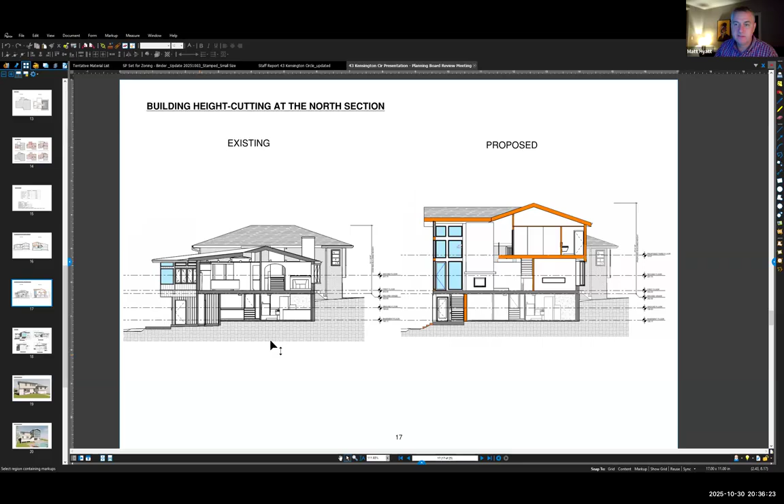All right, seeing none, I'll make a motion. Where is...

All right, the planning board recommends approval of the site plan prepared by Bruce Bradford, professional land surveyor, dated August 5th, 2025, and architectural plans prepared by Lan Qin, registered architect, dated September 10th, 2025, and we recommend the following conditions. Number one, prior to the issuance of a building permit, the applicant shall electronically submit final floor plans and elevations stamped and signed by a registered architect, and a final site plan stamped and signed by a registered engineer or land surveyor to the Director for Regulatory Planning or designee for review and approval.

Two, prior to the issuance of a building permit, the applicant shall electronically submit a landscape plan subject to approval by the Director for Regulatory Planning.

We actually don't have counterbalancing amenities, do we? So I'm going to skip condition 2, strike that. The new condition 2 will be what was listed under condition 3.

That will be: prior to the issuance of a building permit, the applicant shall electronically submit to the building commissioner for review and approval, A, the floor plan, site plans, and elevations displaying the approval stamp for the Director of Regulatory Planning, and B, evidence that the Board of Appeals decision has been obtained from the town clerk's office by the applicant or their representative and recorded at the Registry of Deeds. Do I have a second?

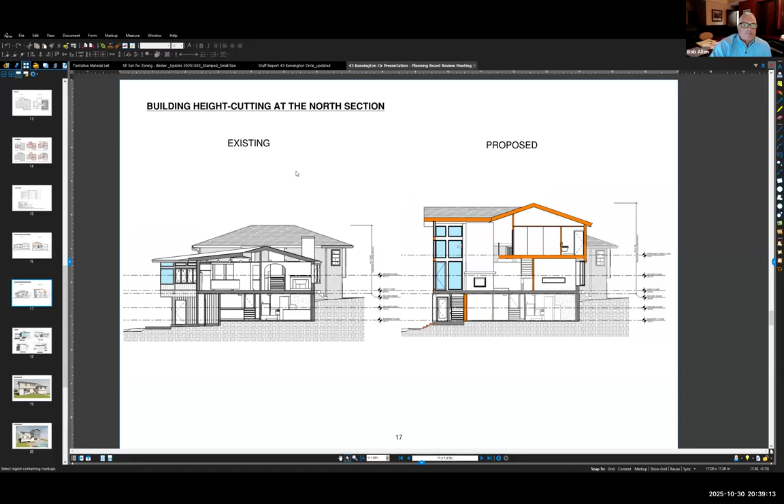Thank you. All right, we have now 43 Fairgreen. I'm gonna get some more water. I'll be right back. Is that the last one? Yep, that's the last one, although it may be a long one. Right back. There goes some of the water too.

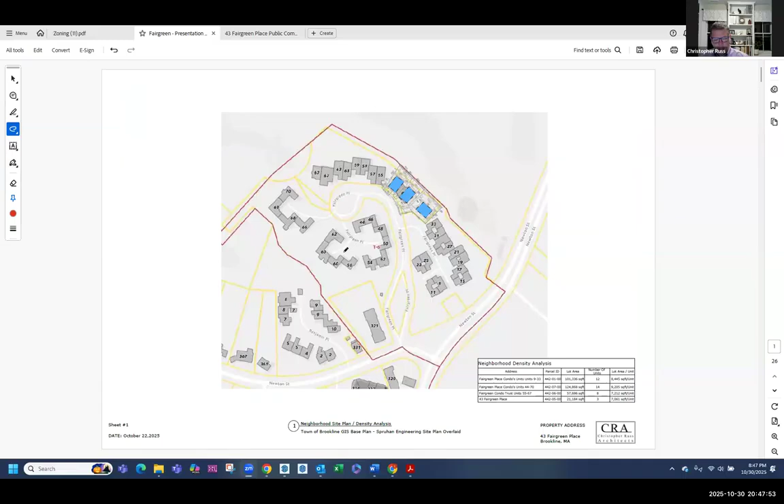Bob touched upon a few things, so I may repeat a couple. Again, the zoning that we're in is a T6 zoning. We are allowed a minimum lot size of 5,000 square feet. Each of our lots are compliant.

Chris, could you make that just a little bit larger? Oh sure, room on the screen. Let's see, that's good. So people can see that it's off of Newton Street - if people know where the Exxon gas station is, you're right at that kitty-corner from there.

So the reason we have this here is to talk a little bit about the density. The blue squares drawn here are our new buildings proposed, overlaid on the GIS map. For comparison, the first section I'll talk about is the lower section, which is units 9 through 33, and it includes this little bit of island space in the middle as well in the area count. The lot square footage per unit is 8,405 square feet. The second section I'll talk about is the upper section, which is a little bit larger land area, at 9,205 square feet per unit.

The next section is our neighbors here, 55 through 67. That lot area per unit is 7,212 square feet. And our lot area per unit is 7,061 square feet.

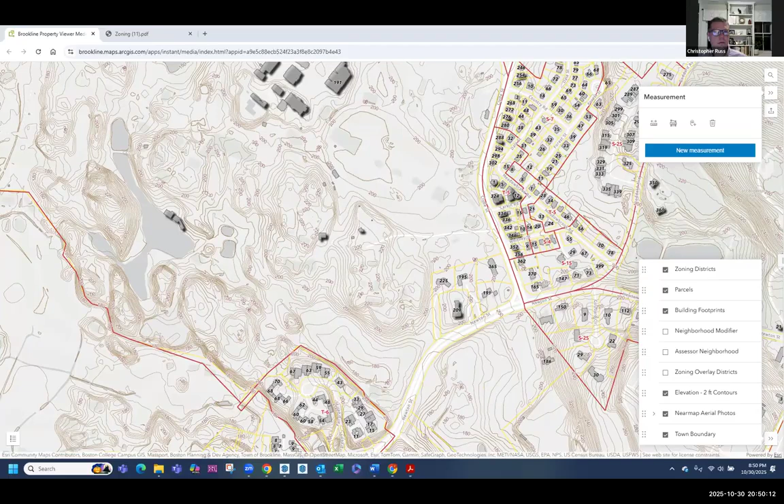Just for reference, the footprints of the condo units are approximately 50 feet by 32 feet, that's this section here, just a rough number, not including the carport section. Our footprints are 47 feet 10 inches, so that would be here versus 35 feet this direction.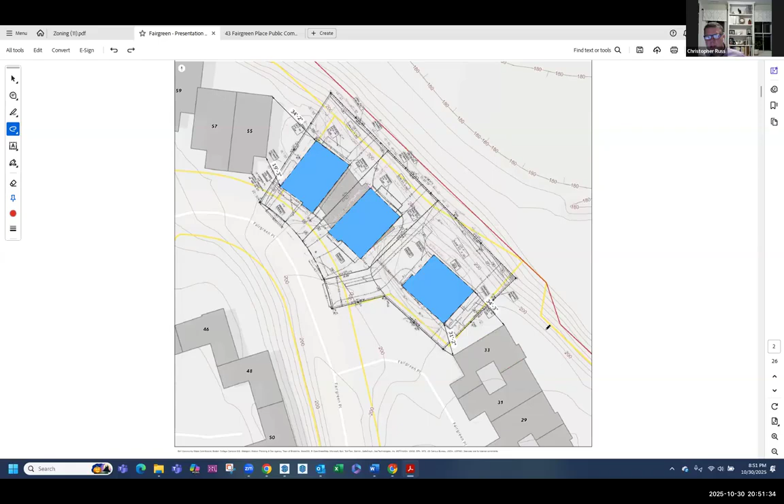Moving along to the next slide, this is an engineering drawing showing that we complied with usable and landscape open space, with different hatches and calculations. This next slide is a little bit easier to read.

Starting at lot 1, it's 5,863 square feet, which is this lot here. Lot number 2 is 5,781 square feet, which is this here. And then lot 3 is a slightly larger lot, just because of the configuration of the property, at 8,646 square feet.

From a grading standpoint, and we'll look at some street images to help explain this more, from the lower side of the street here to the upper side is approximately 3 feet of grade change from the street edge. The proposal is to have relatively flat sites that kind of rise up with the street as it moves along.

These images show image 1, the existing house. Image 2 is 33 Fairgreen, one of our neighbors. Image 3 is 59 and 63 Fairgreen, which is actually one neighbor removed, their house is well screened with vegetation so we couldn't get a good view, but they're all very similar houses. Across the street from us is 48 and 50 Fairgreen, a traditional colonial style building with clapboard and shingle.

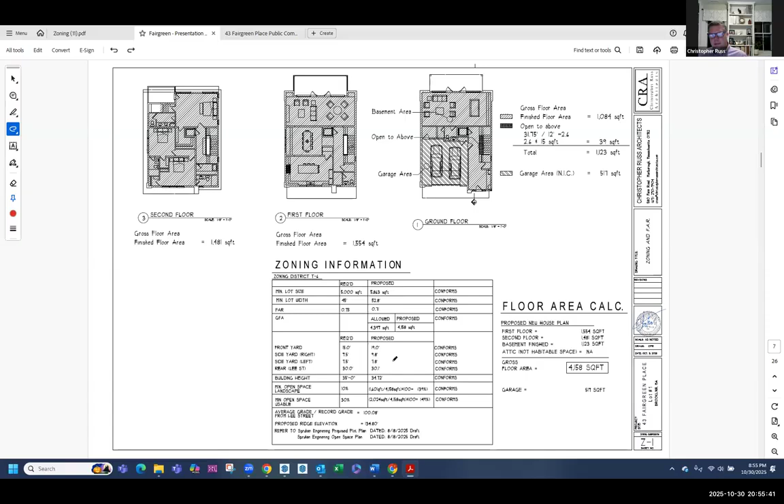This here is all of our zoning information showing that we conform to setbacks, FAR, and open space requirements, so these are fully conforming structures.

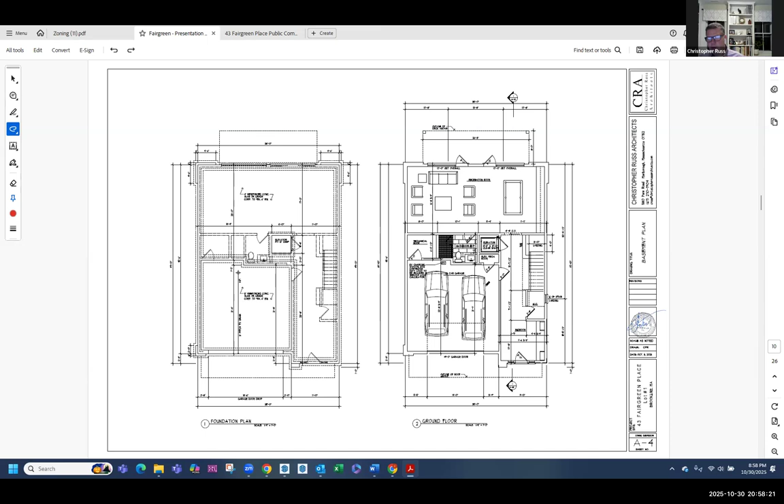And then floor plans, here is the ground floor, garage, mechanicals, and then mudroom space, and then room for TVs.

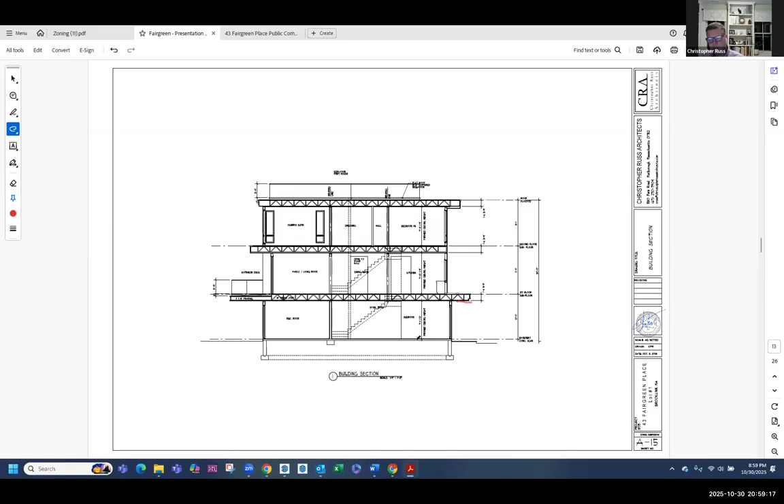And here you can see some of these projections similar to what we have for the carports and things like that, using a similar detail.

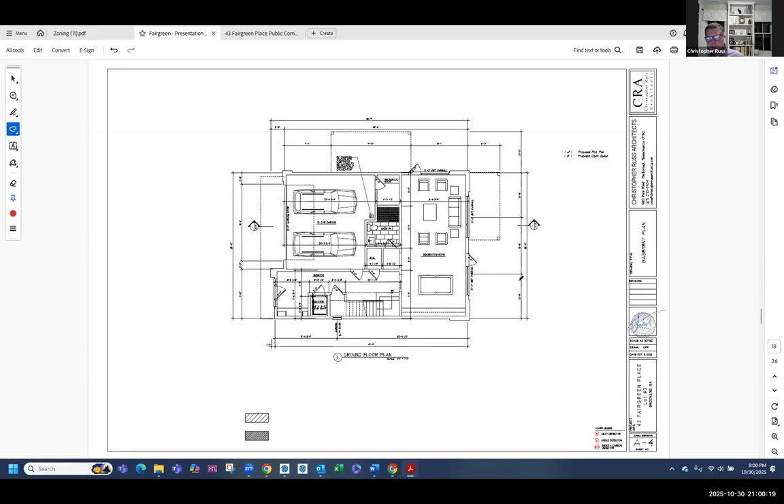Floor plans very similar to what we were just looking at on the other lots. This one just orients the living room and deck towards the golf course. Then we have our roof deck.

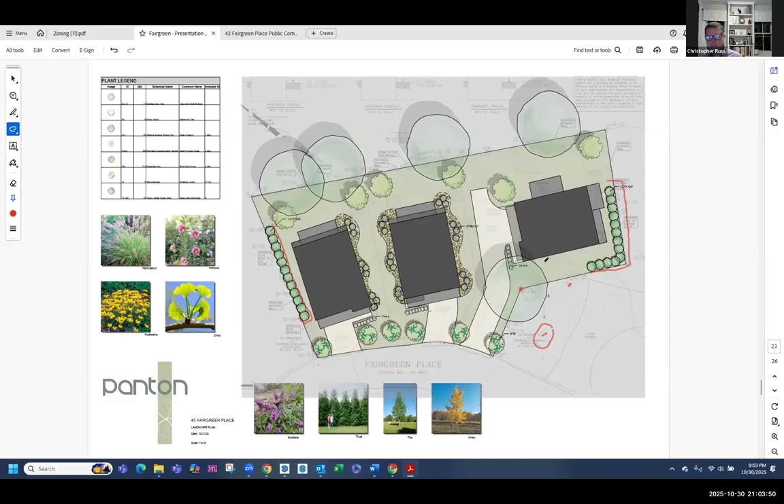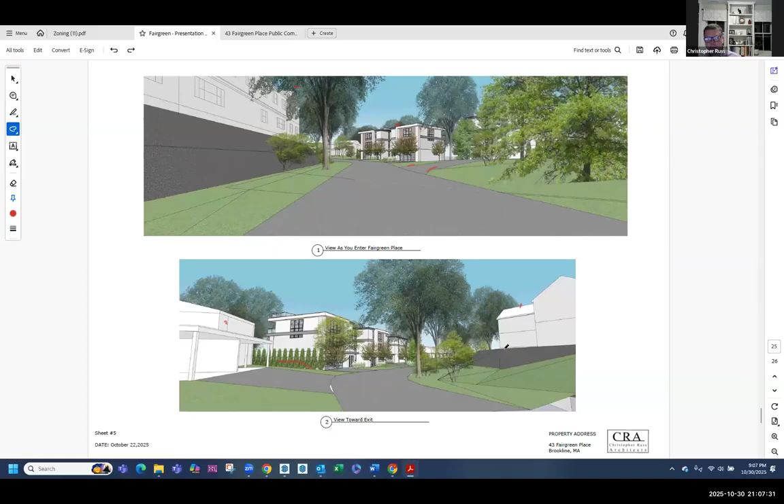And then our street trees running down along the side. The bottom two images are of our site, straight-on images showing again our street trees. The brown here is that wood material we were talking about. This is the nickel gap horizontal siding, this L-shaped piece is the stucco siding, and this here would be brick.

Thank you very much. Attorney Allen, do you have anyone else on your team who wants to share anything? No, looking forward to some feedback, Mr. Chair. All right, appreciate that.

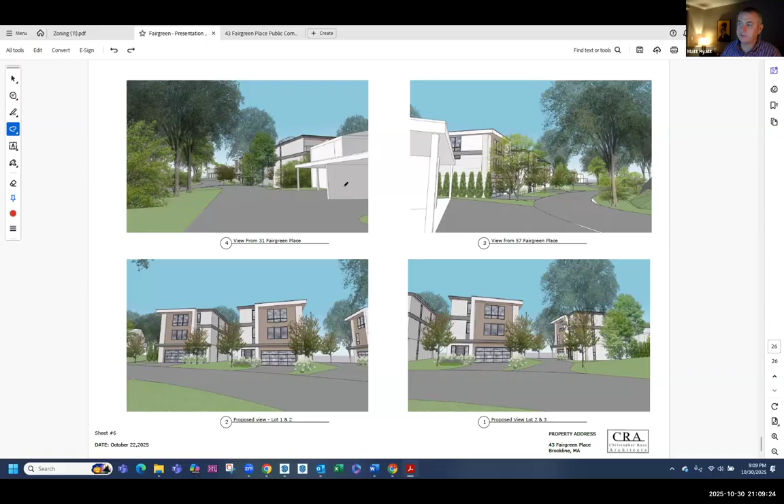I've been simultaneously looking at photographs of the area and the plans on my second screen, so apologize if I wasn't looking at the camera the whole time. Just want to clarify, the subdivision of the lot is done, right? So the lines between the lots and the corresponding setbacks are what you're having to stay within, correct? Correct. I'll frame this for the board, but I'm happy to get pushback—I think we would frame this as design review of 3 separate buildings that happen to be proposed at the same time, but it's not a single structure.

They just happen to be the same building 3 times, but I think from my perspective, I'd love to push on, could they start to have more difference than similarity, particularly with regards to the massing. I don't have an issue with the scale. I'm a little concerned that they look like you designed one building and put it 3 times. And yes, that's what the condos are. But these aren't condos, these are single family homes, replacing a single family home.

So I'd love to think about whether or not there could be some articulation that's different between the one that's closest to the shorter neighbors. Obviously, the one that's closest to the taller neighbor has a different context. And I recognize that the 2 on the left have significantly more setback space at the rear. The one that's turned 90 degrees relative to those is pretty much hemmed in by the setback, so that's not gonna change significantly, but I think its appearance as a rotated building might be something we could comment on. Is there a way to articulate that such that the building does not look like it's turned sideways, but looks like the side is actually the front some way?

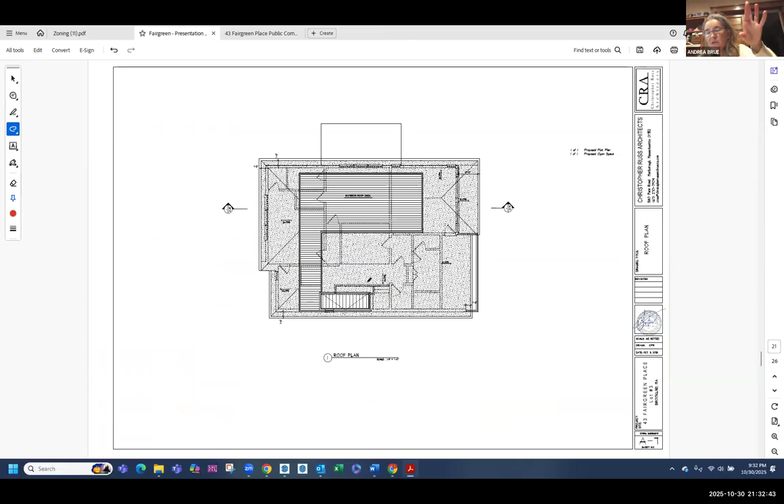The architect also talked about the windows at the stairs, but they don't—the first floor window, if you go to the elevation, was sort of staggered mid-floor, but then the other two were aligned with the floor. So I think there's some more room for some play, and I liked Matt's idea of some push and pull of the massing.

I think some of the neighbors' comments were that it didn't have a sloped roof. I don't think the sloped roofs in the existing condos are that successful, but there may be a way to introduce a sloped roof for one portion of the facade or something that's different that might help break up the massing of the box.

Just because I'm simultaneously digging the Peacock Farm Historic District in Lexington, another hotbed of this period of homes. It's not Brookline, but it is New England, not that far away, and they do have some long, low sloped roofs with some asymmetry. That's not all that different from the condos surrounding it.

So it might be another roof form to think about rather than, to Steve's point, that 90-degree bend is a motif we've seen for the last probably 15 years. I think it's already a little dated and will not age well. So this might be a chance to go to something more classic and timeless, particularly given the context around here. Just to think about that.

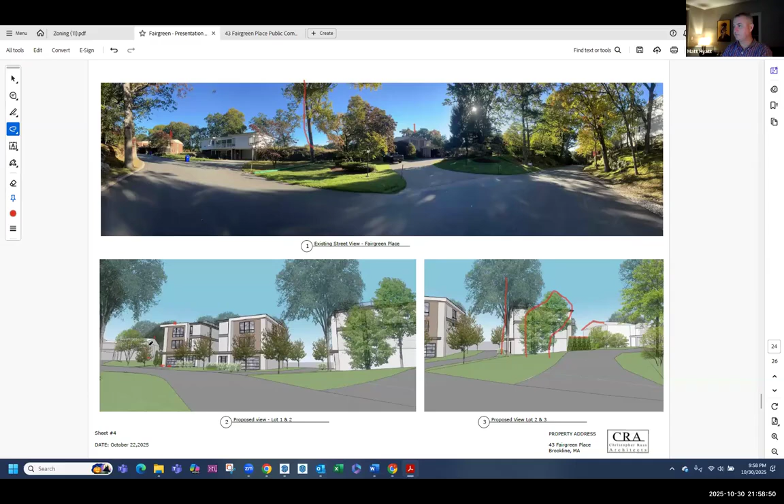All right, so the site - I'm just making sure I read the contour map correctly. It's relatively flat through the depth of the buildings and a little bit into the backyard, and then it slopes significantly up here. So one of the pieces we're going to be taking into account is there's a grade change from here up to the existing grade.

That's the retaining wall on your site plan. Yeah, it's shown as a retaining wall now, but the goal is, assuming there's ledge in there, that we can use the broken face of the ledge and try to keep it as natural looking as possible - and we appreciate the comments on the landscape, yes we should develop that further. That's part of the discussion, how do we naturalize that transition versus build a retaining wall along this side. So the retaining wall along this line is approximately 3 feet.

And the same is down here on the edge of lot 3 and 33. And then on the opposite side, it retains your site from the neighbors? Yep, on both sides - you're lower than the neighbors on both sides. Okay. Is it roughly 3 feet on both sides? Yep, exactly.